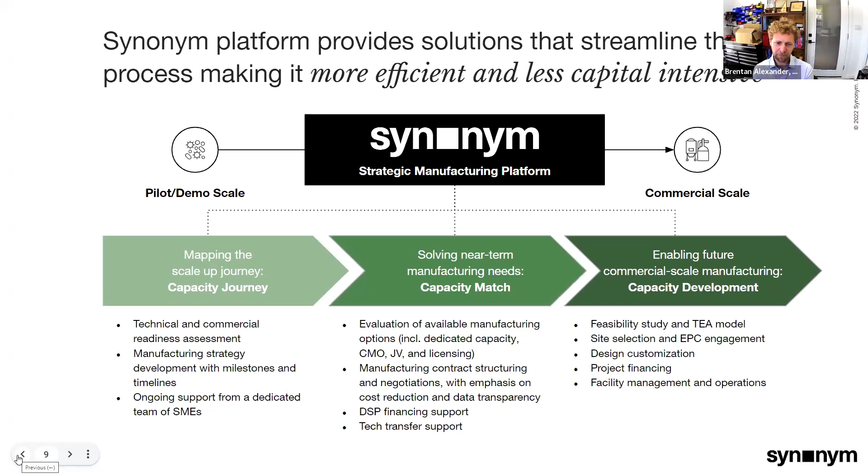Now, one of the key products that we've built along our journey here that many folks may be aware of is called Capacitor. And special thanks to GFI for being a collaborator on the Capacitor project. Capacitor is a database of capacity, 250 plus facilities around the world, providing over 49 million liters of capacity. And this is sort of the first stop to understand what capacity is available at different sizes around the world.

Now, what came out of starting to build Capacitor and then continuing to build our business is this question of, are you ready to scale? So being ready to scale means having capacity. Building capacity means being able to attract capital. Attracting capital means being bankable. And being bankable means being underwritten.

And so we think about the world at Synonym, or at least I think about the world from the CIO standpoint, from this bankability and underwritten standpoint, because when many people in the industry talk about scaling up, they think about it primarily from the technical lens, scaling up strains, scaling up processes. But scaling up also means being bankable and being able to attract the capital necessary to actually scale up.

And so being underwritten to know that you're bankable means you understand your costs. What are your operating costs for labor, utilities, SG&A, et cetera? What's the capital cost for actually building a facility? It means understanding resilience of your processes. How do the costs change, and how does that impact profitability of a particular process? What are the primary risk drivers that could impact the profitability of a company?

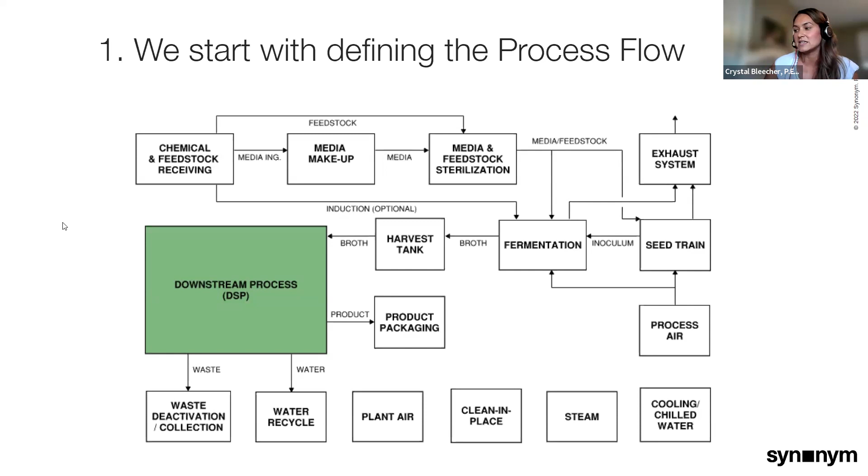And each process will also include some packaging, as well as the supporting utility systems, such as waste collection and inactivation, water recycle, plant and instrument air, CIP, which is clean in place, steam, and cooling and chilled water systems. So what can vary greatly depending on the type of product that is being produced is the unit operations in the downstream process. So the Scalar tool will ask different questions depending on the type of fermentation that's selected. So whether you select biomass or precision fermentation, and also depending on the type of product that's selected.

We do that in order to identify what the process flow is, and therefore what the unit operations are in the downstream process. So currently in Scalar, the precision protein and the dried biomass downstream process flows are well defined in great detail in the Scalar engine. And that's this kind of block flow that I'm showing on the screen now. We do make some high level assumptions for other products, such as lipids and small molecules.

But just taking, for example, precision protein, if that precision protein is extracellular, then the very first unit operation is cell separation. However, if the product is intracellular, then we have to start with a pre-lysis cell separation step to concentrate the biomass prior to the lysis step. From that cell separation step, the biomass is sent to a biomass inactivation system. You'll notice that there are questions in Scalar regarding biomass valorization, and that defines what that unit operation is. And the liquid stream is then further clarified in the clarification step.

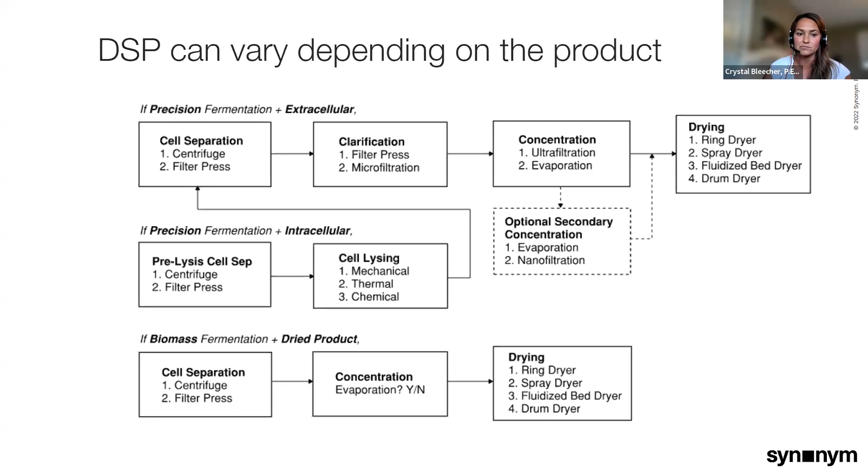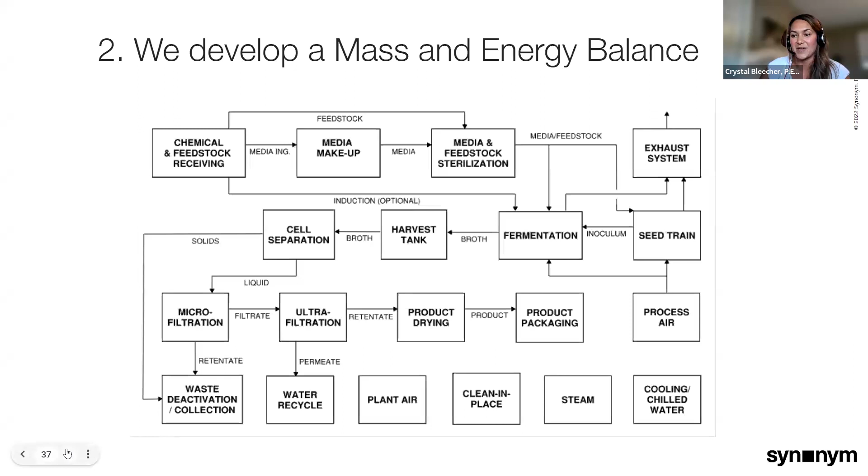So once the process flow has been defined, and specifically the downstream unit operations, the technical inputs around each unit operation are used to develop a mass and energy balance. That mass and energy balance tracks the total flow throughout the process. It tracks the product flow. It tracks water flow throughout the process. And it also estimates major heating and cooling requirements.

So for instance, for aerobic fermentation, the fermenters are highly exothermic. So there's a large cooling requirement in fermentation. For the dryer, there'll be a large heating requirement. What I'm showing on the screen here, all of these numbers are just illustrative, and these flow rates and energy requirements can vary greatly depending on the technical inputs that are provided in Scalar.

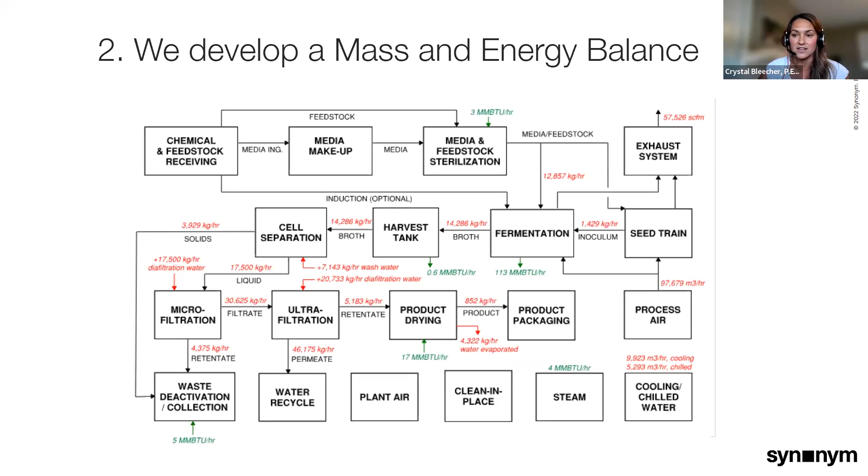So in the third step, we size the unit operations that were identified in the process flow using equipment sizing calculations as well as the mass and energy balance requirements. We then compare that sized equipment list against our internal database of equipment cost. That internal database has been developed by obtaining budgetary quotes from vendors for all the major equipment. We've attained those over the last 12 months. And then we use a cost scaling equation to develop a priced equipment list.

So the cost of a piece of equipment is equal to the quoted cost of the equipment times the ratio of the equipment capacity to the quoted equipment capacity to the nth power. That n can vary. It does vary depending on the equipment type, but on average, it's about 6/10. And so sometimes that's referred to as the 6/10 rule in cost estimating.

Next, we utilize that sized equipment list to develop footprint requirements for different areas within the facility. And then we use a dollar per square foot estimate for each building area. So the different areas of the buildings have different finish requirements, different HVAC requirements, and so therefore the cost of construction is different. We developed those dollar per square foot estimates from analyzing recent project data. And so in Scalar, selecting things like food grade versus industrial grade will have a big impact on what those dollar per square foot requirements are for certain processing areas.

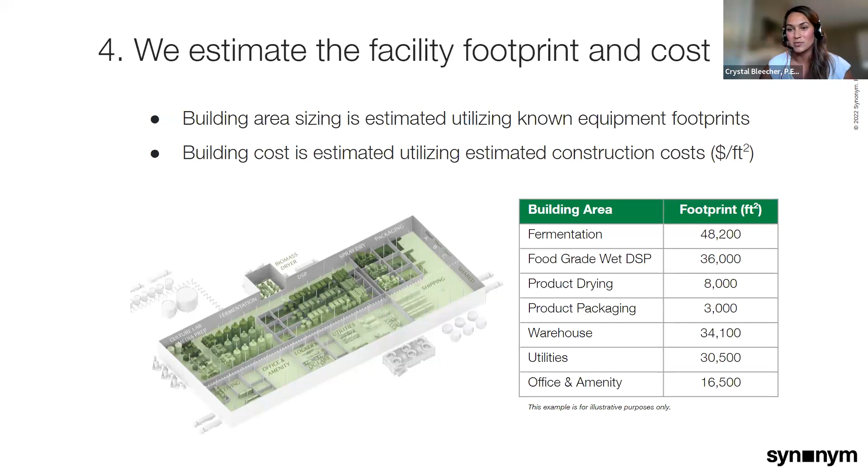One thing I want to point out is that the CapEx that's reported in Scalar does not include project contingency or cost associated with project guarantees. Brentan will touch on this later on when he talks about the financial cost, but there are additional costs to consider, such as contingency, when calculating the full project cost.

So in this section, I'm also going to walk through how we take those technical inputs and then develop the operating costs. Now, we don't have time to do a deep dive on how we develop all of the operating costs, but I did want to highlight in this table the major technical inputs that influence the different operating costs.

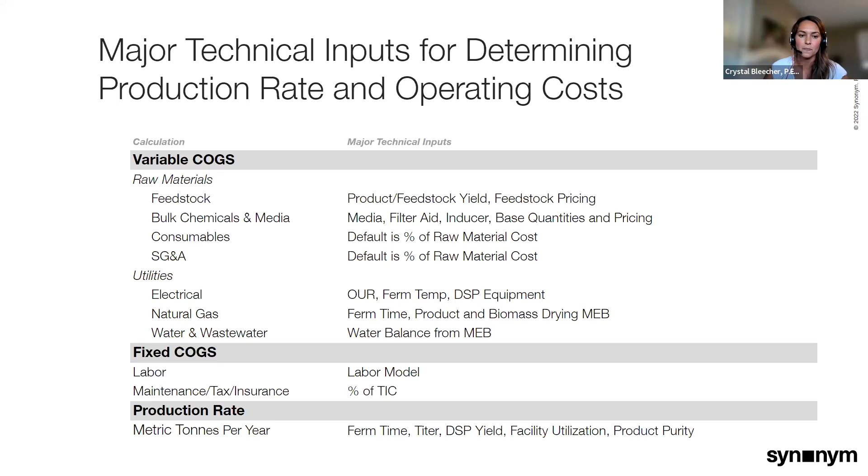Moving on to how we come up with electrical costs. There's a lot that goes into this, but from a high level, aerobic fermentation processes use a lot of electricity, and the main drivers for that is the mass and heat transfer within the fermentation itself. For high OUR fermentations, this can sometimes account for 70% of the total facility electrical usage.

So starting with mass transfer, we have two knobs that we can turn for mass transfer. There's agitation as well as the air flow rate to the sparger. Often we refer to that in units of VVM, so standard volume of air per volume of broth per minute.

In the Scalar engine, we use the peak and average OUR inputs along with KLA, KLA meaning the mass transfer coefficient. So we take the peak and average OUR inputs along with the KLA equations to estimate the power and velocity requirements in order to determine the agitator and fermenter compressor sizing and therefore the electrical usage. The peak OUR is used to determine the equipment size, and then the average OUR is used to estimate a time average electrical usage for the OpEx calculation.

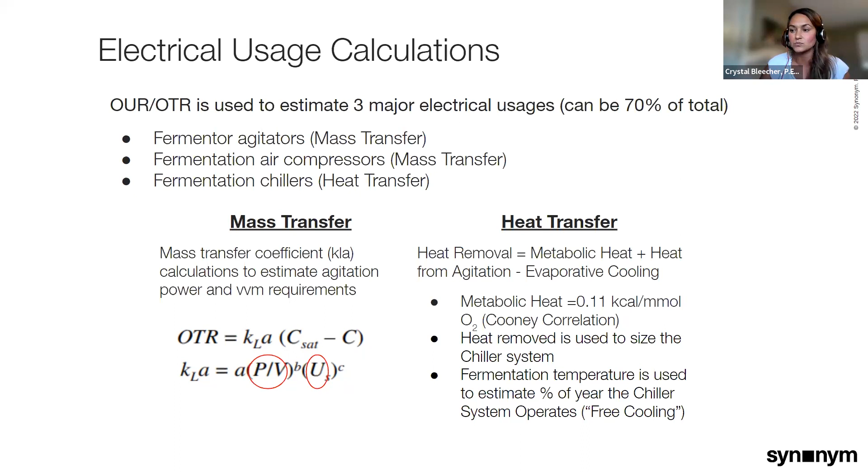So a lot goes into the electrical calculation. That's just on the fermentation side, but that is a big portion of the electrical usage for aerobic fermentation facilities.

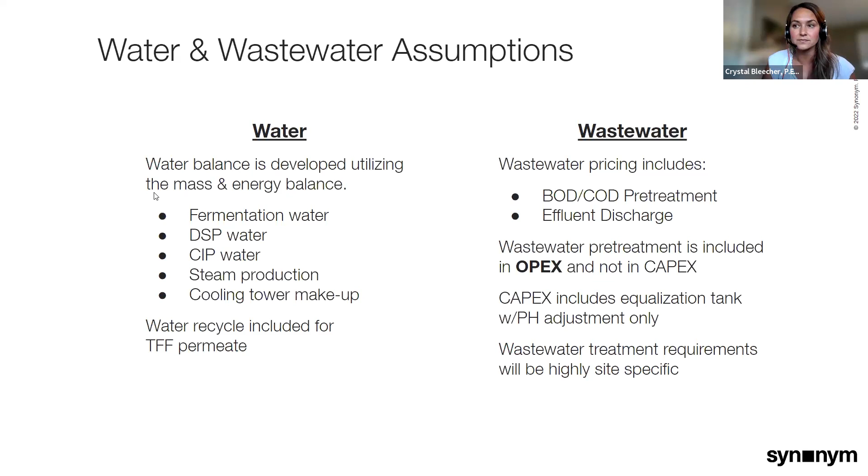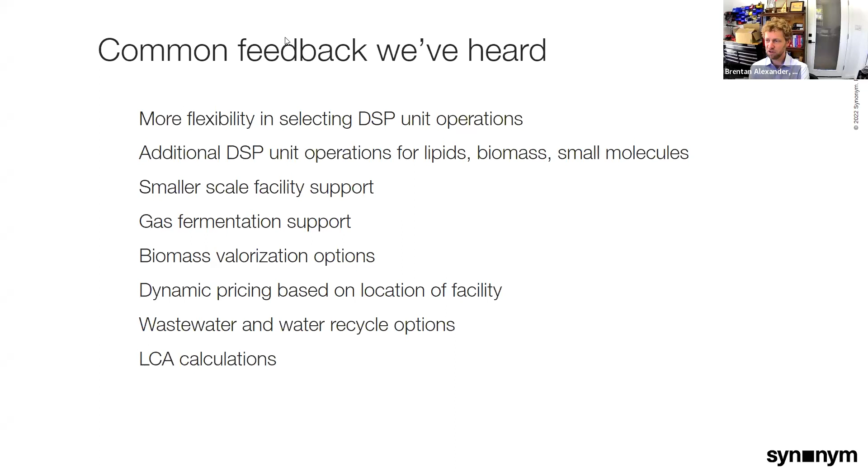So that's the technical and financial model. As we move over now to the case study and actually the live demo, sharing some of the feedback that we have heard to date from many of our users: things like having flexibility in selecting DSP processes, supporting smaller scale facilities, other types of fermentation like gas fermentation. I saw in the Q&A there's a question about continuous fermentation, which we partially support today. Calculating LCA, in terms of if we know how much natural gas and electricity are used in various jurisdictions, can we calculate the greenhouse gas impact of that? These are many of the things that are under consideration now for the Scalar roadmap.

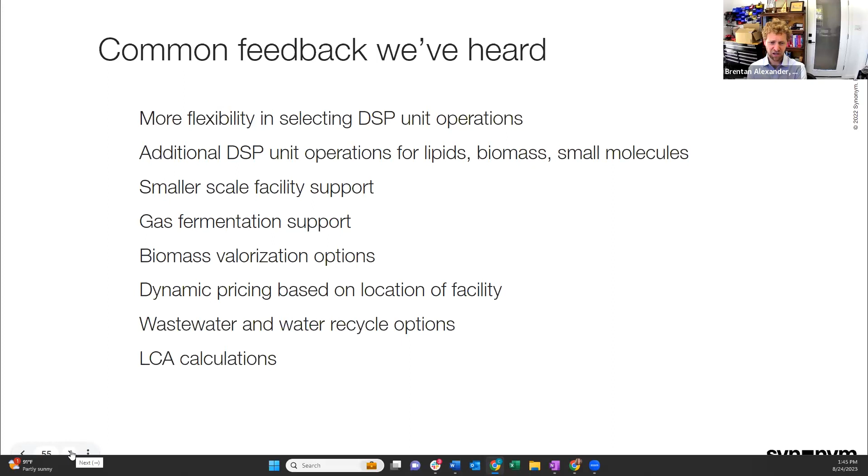And so as we go through the case study, encourage folks to put into the Q&A or into the chat any areas where they think improvements could be made or new features could be added that would make Scalar even more useful, so that we can take that feedback to our product planning side to make sure they're included in our future roadmaps.